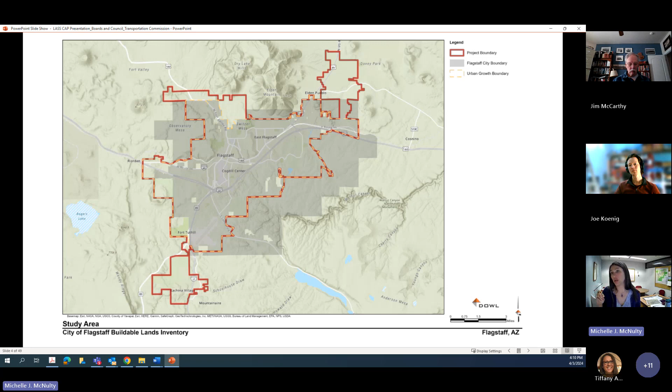From the land availability suitability standpoint, we looked at an area a little outside of just our city boundary. The gray shaded area is the Flagstaff city boundary, the red area is the project boundary, and with the yellow and red hatch is the urban growth boundary. We looked outside the city boundary because those are corridors still in our planning area under the regional plan, where we have rural activity centers. We wanted to look at those areas to see if there was potential that would also advise us if we needed to expand our urban growth boundaries.

We have a very progressive code, residential is allowed in almost every single zoning district, whether as a mixed use or just a primary use. So we looked at almost all of our land use categories and zoning districts. There were some lands we didn't look at, like Forest Service or National Park Service land, public open space, school sites, and other select publicly owned lands that we knew had land deeds that wouldn't allow for housing.

Again, we looked at what was vacant and underutilized, with vacant meaning no development, and underutilized meaning 10% or less improvement relative to the underlying property value. We did a second screening after compiling all those and removed things that we knew didn't count as land, like condo building parcels, which show up as one big parcel with weird property values, and narrow strips along right-of-ways that aren't really developable.

We also did an environmental screening that looked at the environmental constraints we regulate through code, including wetlands, stream buffers, slopes over 25%, and the 100-year floodplain. That helped us understand what is constrained or not really buildable versus unconstrained, which means more buildable.

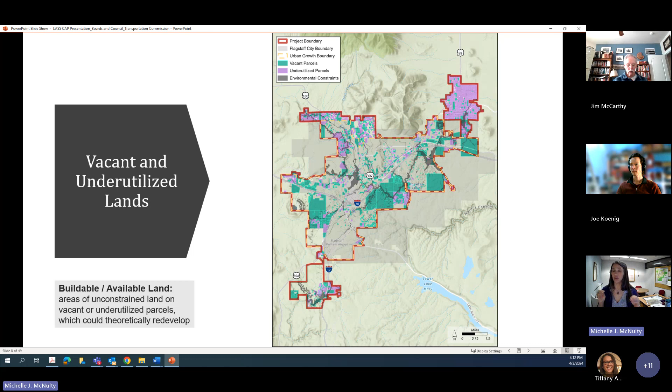Here's a general map of what we found. This is the general inventory of what was vacant, shown in green. Underutilized parcels are in purple, and we showed the environmental constraints in gray. We'll be sending out a link after this presentation to the full reports, and you'll be able to get into the maps in a lot more detail there.

So just some general conclusions. We have about 8,125 acres of vacant land, of which about 6,700 acres are residentially zoned. We have about 5,400 acres of underutilized land. About 13% of the vacant land is constrained with environmental constraints.

One thing we did not consider is that we also regulate tree resources. Residential development under residential zoning is required to save 50% of existing trees under the resource protection overlay, and that's a lot harder to do, so we did not calculate for that. That 13% could be further constrained when you include the tree count, which leaves us with about 7,000 acres of vacant buildable land and about 4,800 of underutilized land.

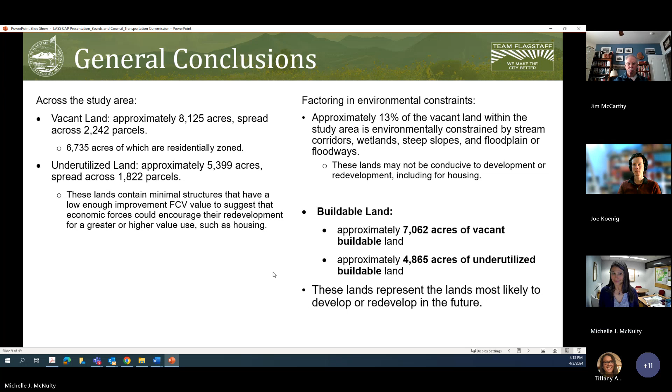The most common environmental constraints are steep slopes and floodplains. Anybody that lives in Flagstaff won't be surprised by that. With the Rio de Flag flood control project, though, that could actually remove some of those constraints on land that's in the floodplain. So that's a really important project for our community.

Within the bigger inventory, we drilled it down to about 50 opportunity sites. Opportunity sites just mean they have a certain level of readiness that they could be developed. It might be development projects or infrastructure going on in the vicinity, or it could be that they have the right zoning with infrastructure coming to the project site. That's kind of how we drilled those down a little more specifically.

So the overall challenge on the opportunity sites is that a majority of our land needs to be rezoned. A lot of the land identified as available is in our lowest density zoning districts, RR or rural residential and ER, estate residential. Both are limited to one unit, one dwelling per acre, so that's a really low density, and it has missing infrastructure.

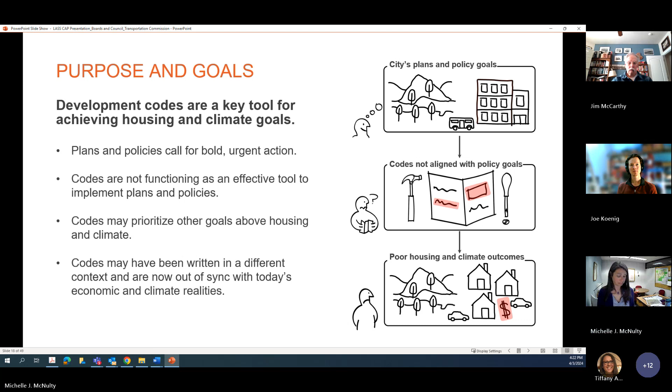The code analysis project is going to be a 3-part process. Right now, we are just at the diagnosis. It's really to help identify and evaluate barriers, opportunities, and conflicts. I really want to be clear that when we're saying barriers, we don't mean that as a negative. We see that as where we see opportunities that we can align our codes to help get our goals met.

We will also be developing concepts and approaches for code and process changes, as well as specific code changes. We'll be coming back to different commissions, such as yourself and the City Council, as we finish those steps. But right now, we're just at the diagnostic.

So the code analysis plan really looked at, first and foremost, our Flagstaff regional plan, and then within that, there's the 10-year housing plan, high occupancy housing specific plan, our Flagstaff in Motion, which is Mountain Lines plan, the active transportation master plan, and our carbon neutrality plan. The consultants really tried to distill down the key outcomes that are in these plans that are impacted by codes.

And then they did a whole scan of all of our development codes - building regulations, fire, public ways and property, zoning code, including both our affordable housing and our residential sustainable building incentives, our general plans and subdivision code, engineering design standards, as well as our development review process. And then looking at also technical manuals that say how we should do our transportation impact analysis. We also have a policy for affordable housing, and then the Mountain Line design guidelines for transit facilities.

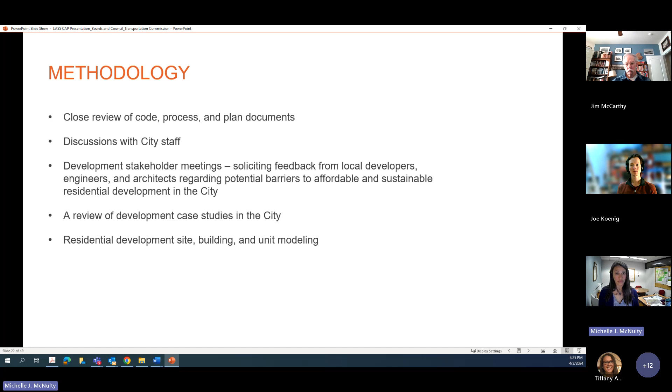So some of the key findings: going back to the last point, a lot of our buildable lands are located on the outskirts of town. And when I say that, where there's not infrastructure readily available, and they're in that lower zoning district, which means lower density zoning district, which means they're likely going to have to come in for a rezone in order to develop at a higher density.

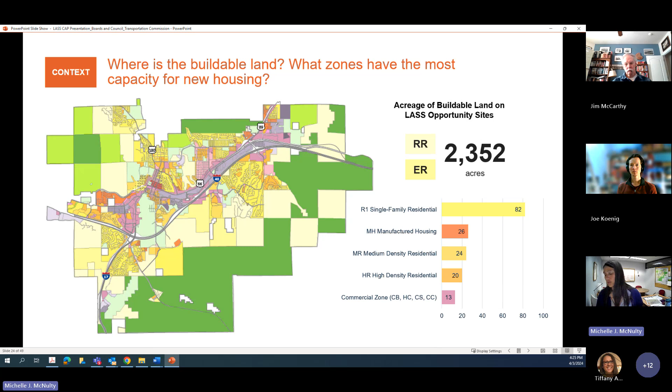So that tells us we really need to look at our rezoning process and our subdivision processes, because a lot of those lands have not been subdivided, so that they can keep pace with our needs. And then when those rezonings occur, that's when we really have the opportunity to work with a developer to ask for more than what code allows in order to, within a proportionality, help meet our housing and climate goals.

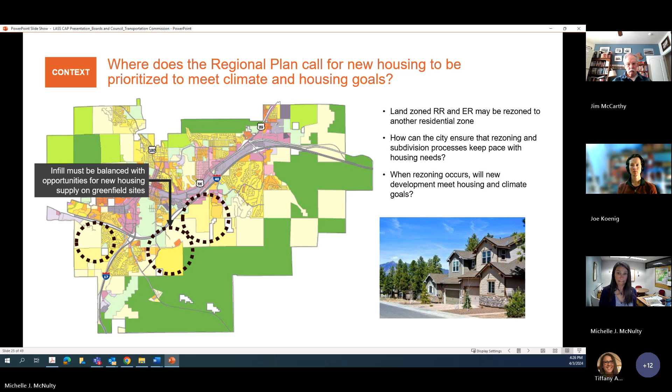We've also considered displacement, and so we wanted to understand what are the neighborhoods that are experiencing displacement right now and where they are in the stages, so that we can better understand code changes and how they would impact these populations, and also understand how widespread it is.

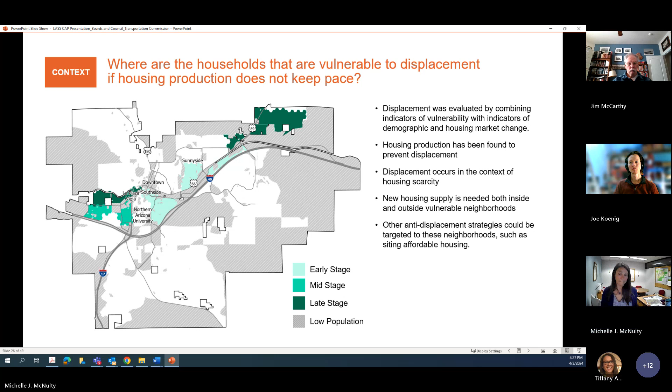So again, some citywide issues and barriers are in our zoning map subdivision process, looking at incentives for affordable housing and sustainable building design, and our resource protection, which we're finding is not optimized to balance housing production goals with environmental goals. We really need to look at how to reduce our parking requirements. That's also a critical barrier to housing affordability and development feasibility, and it's not in alignment with our climate goals for higher density housing in transit-served areas.

Our high occupancy housing requires, in most cases, a conditional use permit. Some specific zones we need to look at, in addition to that, are R1 and R1N, which are low density zoning districts, and our MR, or medium residential density, and our commercial zones, which allow for higher density.

Some of the issues with our process identified by our consultant team, and from feedback from different folks I've mentioned, is that development agreements often occur with a rezone, which can limit the flexibility of a property. It also encourages negotiations to address citywide needs that sometimes can't be effectively addressed on an on-site basis.

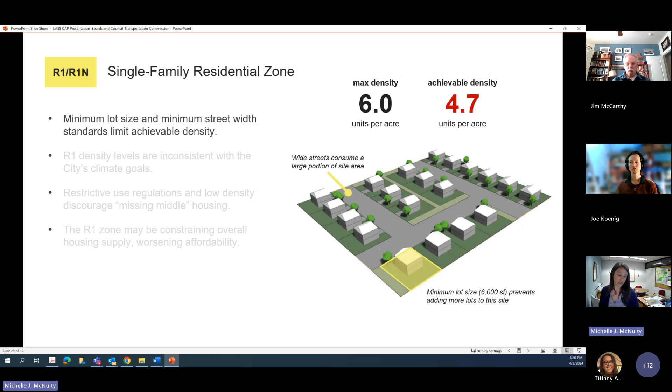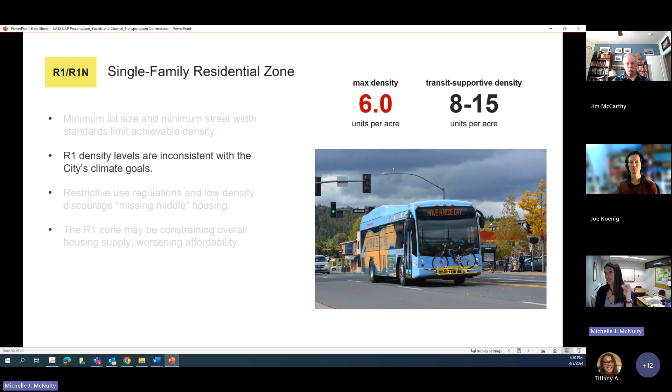And this is inconsistent with our city's climate goals, when we know that to get transit-supportive density we need about 8 to 15 units per acre. A lot of the R1 zoning is in areas near those vulnerable neighborhoods, so we really need to understand how to get higher density so we can support transit serving those neighborhoods.

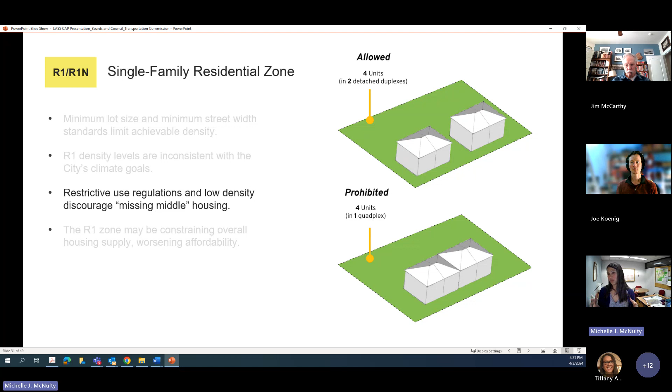This gets into missing middle housing, being that cost point in between what's affordable and the really high-end houses. We have a lot of barriers to achieving that missing middle price point, and it's constraining our overall housing supply and worsening our affordability issues.

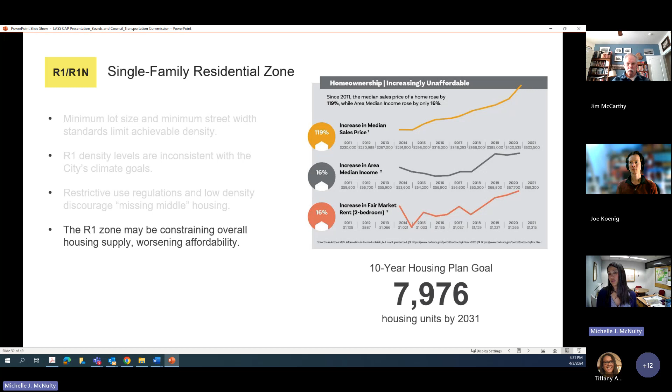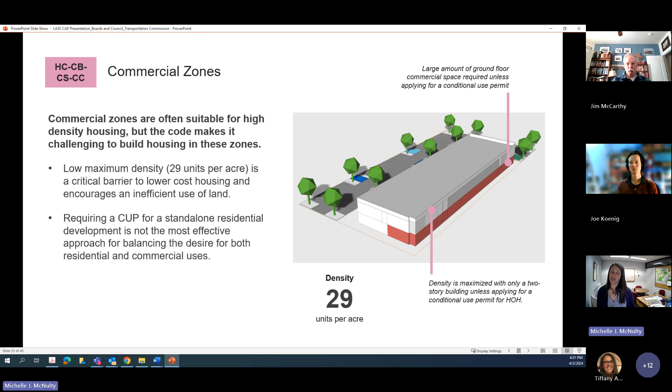Looking at our commercial zones, these are most suitable for high density housing, but in some ways the code makes it challenging to build housing in these zones, specifically because of the requirement for a conditional use permit. So we need to look at how we can potentially reduce that barrier.

Another citywide issue is minimum parking requirements. This is a barrier to providing our housing and meeting our climate goals, but we do need to look at other ways to get people out of their cars, rather than making it so reliant on a site-by-site instance.

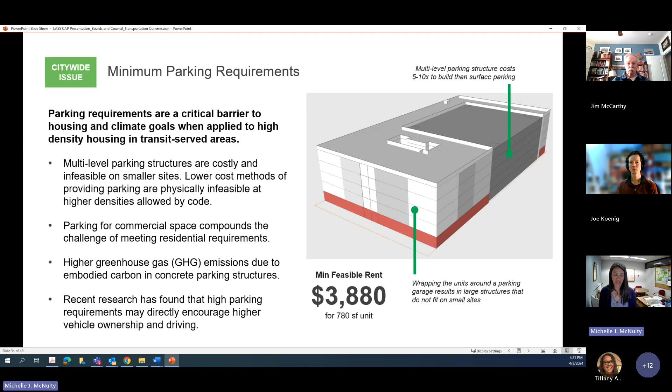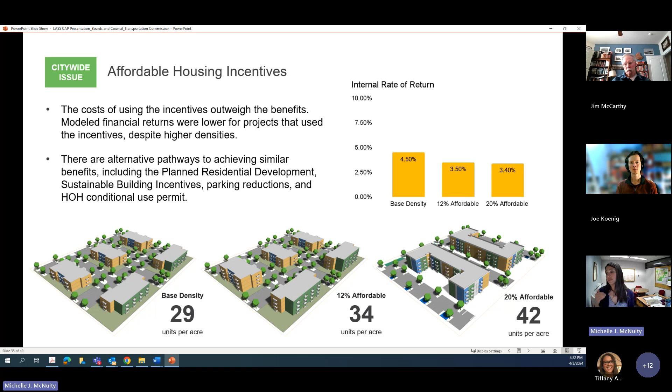With housing and affordable housing incentives, we've found that the benefit doesn't really get a return on investment, so there's really not the financial incentive for a developer to take our affordable housing incentives. We need to look at how to improve the value of those incentives so people start bringing affordable housing to their projects, even by right - meaning with their current zoning - so that we as a city don't have to rely only on getting affordable housing from developments going through the rezone process.

Very similar is true for the sustainable building incentives - some features could be required, while others lack compelling incentives. And then there's the whole conversation about needing to decarbonize the grid system in order to really become carbon neutral. So it's a big conversation.

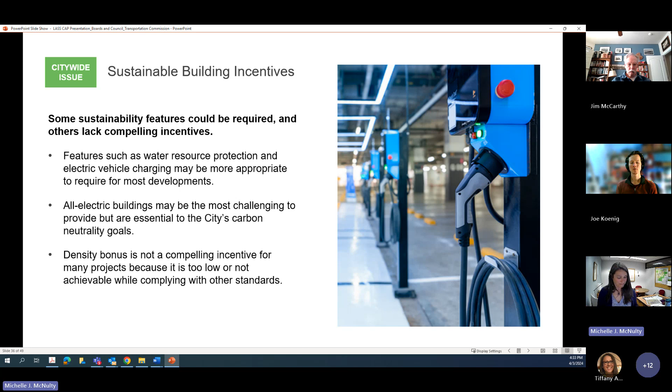And then just making sure that as we address the barriers, we are reconciling tensions with the city's other goals and policies. We don't want to lose sight of community character, historic preservation, making sure we have sufficient infrastructure, parking management, resource protection, and bringing the public along with us as we make changes not just to our regional plan, but to future codes that could come out of this project.

So some of the key findings, just examples from stakeholder comments. There are elements of the water sewer impact analysis and TIA, or traffic impact analysis, that can be barriers to development. So this project will look at how to streamline these processes or bring more predictability to them.

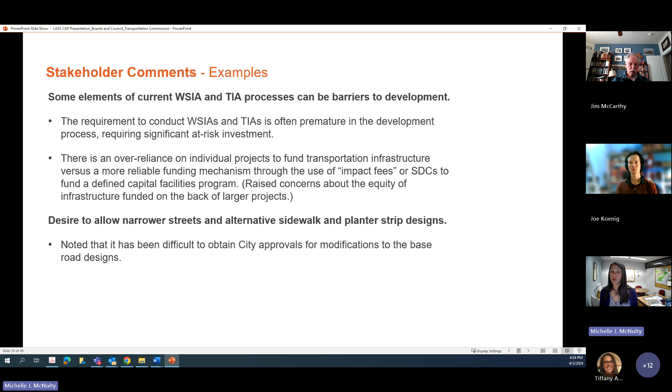There's also a desire from our development community, and I think a lot of people in the community, to allow narrow streets and alternative sidewalks and planter strip designs. Obviously we don't want to put that over safety, so we want to make sure we're still meeting the needs of fire and our maintenance folks. But is there maybe some opportunities to provide modifications or other ways of looking at how we do our road design?

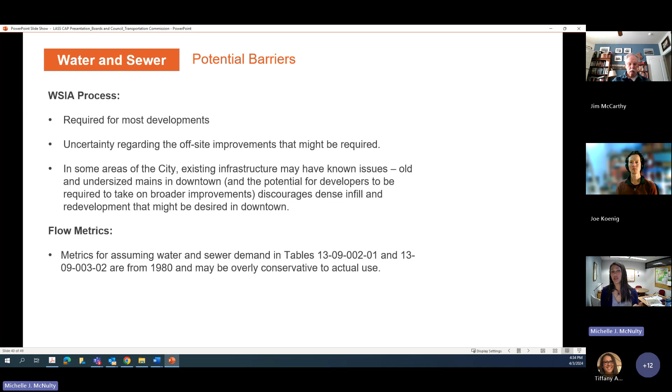Again, the water sewer impact analysis is required for most developments. It's a necessary impact analysis, but looking at how it could be streamlined and more predictable.

And then the transportation access code issues, which is pretty important to this group: our street cross sections are seen as wide, complex, and prescriptive. Our winter parking ordinance really restricts our ability to allow off-site parking or on-street parking to be used for development, because about 5 months out of the year you can't park on our streets, for winter maintenance.

Cul-de-sacs are typically very wide and generally create an inefficient development pattern. Our setbacks on alleys conflict with the benefit of having an alley by promoting the building forward, pedestrian oriented, but our setbacks are wider than needed, yet not wide enough to accommodate parking.

Driveway standards may need more flexibility and options for reduced standards for smaller multifamily developments, that 3 to 4 unit type. And then parkways, they're wonderful and a very big attribute to our community, but the cost to developments is high and they require significant space and expense. So how do we better balance that with the contribution to higher housing cost, lower density development, and the use of scarce water resources?

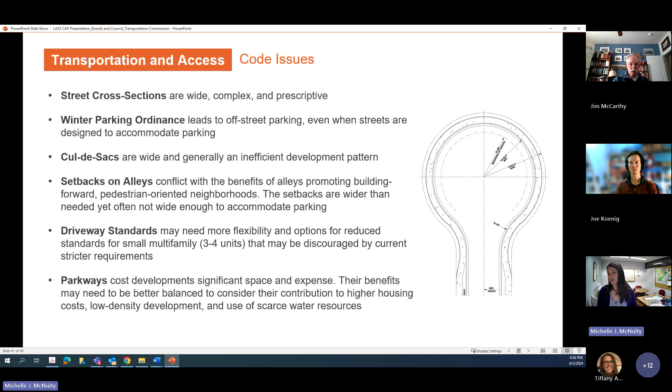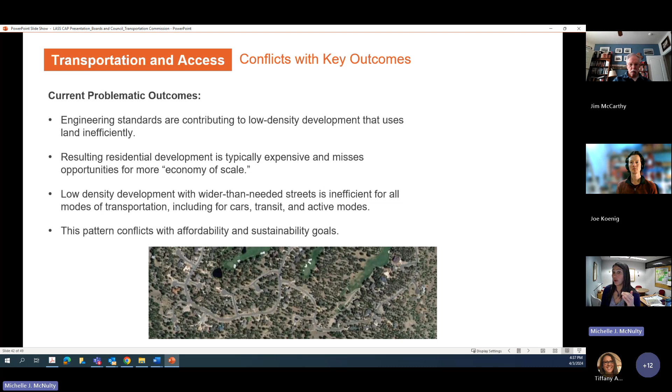So again, engineering standards are seen as contributing to lower density development that uses land inefficiently. I do know there have been a few engineering standards brought forward that start to chip away at some of this. But seeing that connection between those standards and how they reduce residential development from a density standpoint and efficiency is really important.

Again, I feel like I'm picking on the TIA, but this is just what we hear as potential issues and concerns from developers: that they can be subjective, and that can have a major impact on a development schedule and cost, and could actually result in developers decreasing the unit numbers so they don't have to do such a large study, which costs us more housing because they're not bringing the bigger project forward.

Transit and active modes requirements and mitigation may also be subjective and difficult to predict, and this can negatively impact housing production and affordability. These requirements should be more clarified to help better promote improved transit and active mode networks. Again, the unpredictability of mitigations leads developers to avoid higher density development or cut back on units so they don't trigger certain requirements.

So one thing we could also look at is a standard impact fee, which is something we as a city look at every 5 years. This could help, since there's still the development cost that developers are paying for these offsite improvements, but it would be a little more predictable and standard. And I know we're working on ways to help set the framework to provide a more standardized process.

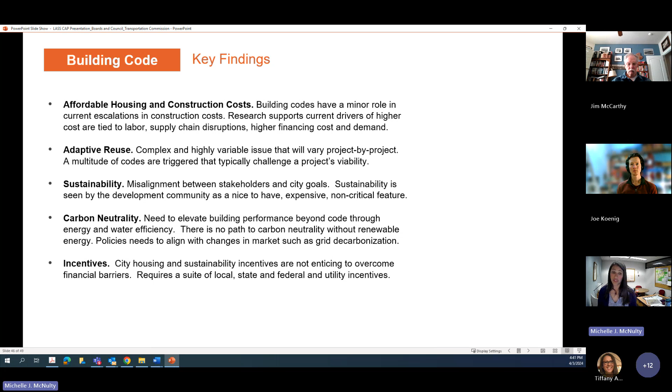With carbon neutrality, we really need to elevate our building performance beyond code through both energy and water efficiency. And then we need to start looking globally or nationally at grid decarbonization to really be carbon neutral. City housing and sustainability incentives just aren't enticing enough to overcome the financial barriers, and this might require using a suite of local, state, and federal utility incentives.

So how is this all going to be used? We're going to be informing the regional plan, and the rest of this will be informing the rest of the code analysis project.

Staff will be working through this process to prioritize recommended code changes. Engineering has been working on some prioritization of code changes, and we've been working with them as part of this project. So you'll see a lot more of us coming forward with code changes in the years to follow. Processes are continually being vetted and modified as recommended through this process, and we get feedback from users to understand how we can be more streamlined with our development review processes.

So just some key dates. This is one stop of several different commissions we're meeting with: sustainability, housing, planning and zoning. Then we will take this information to the city council to get their feedback. Once we get all this feedback, we will be finalizing the draft LASS report.